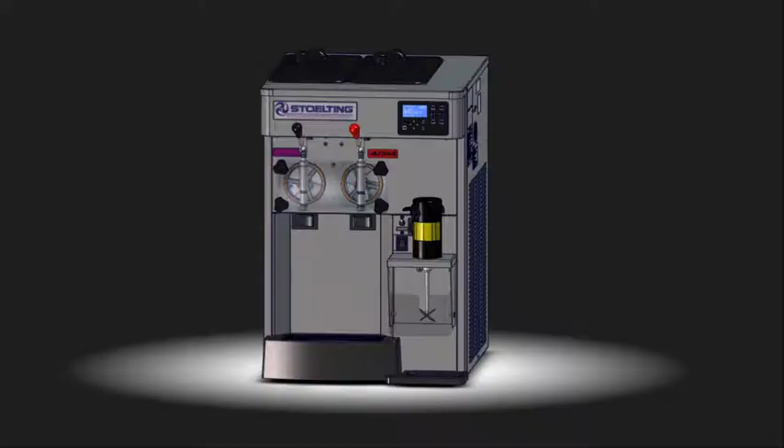Remove the hopper covers and mix inlet regulators from the hoppers. Press the off, then the clean buttons.

When the product in the barrels has melted, after about 5 minutes, open the spigots to drain. Press the clean buttons to stop the augers.

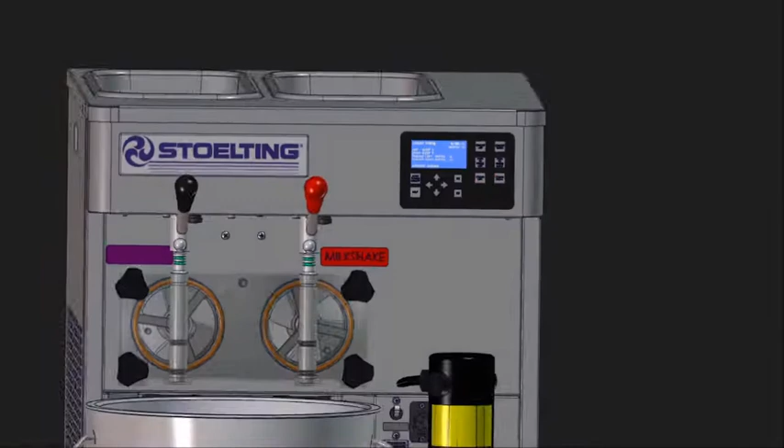Fill the hoppers with 2 gallons of cool tap water and press the clean buttons. While the augers are rotating, scrub the hoppers with a clean brush.

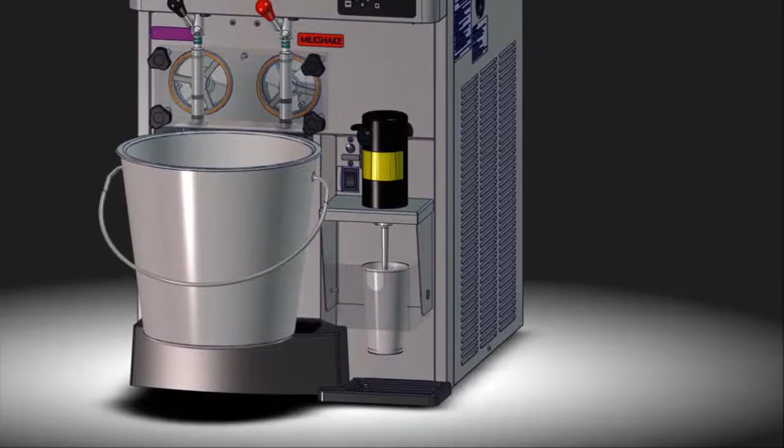Fill a tall cup with water and put the blender agitator into the cup. Press and hold the low speed button and allow the agitator to run for about 10 seconds. Turn the blender off.

Drain the water from the machine and press the clean buttons to stop the augers. Press and hold the main power button for 3 seconds to turn the power off.

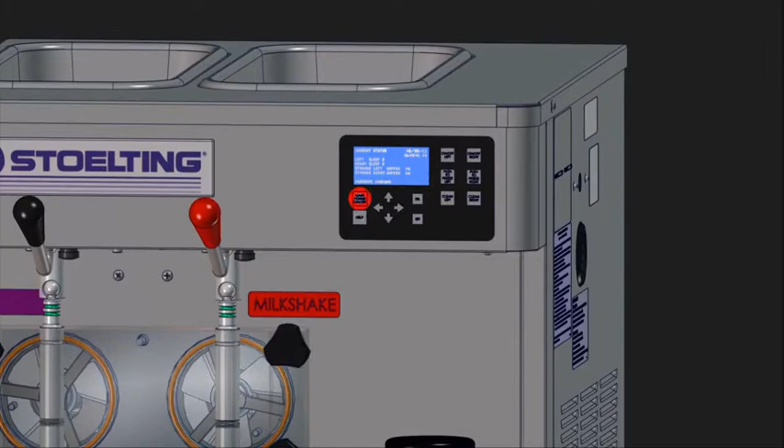Machine disassembly.

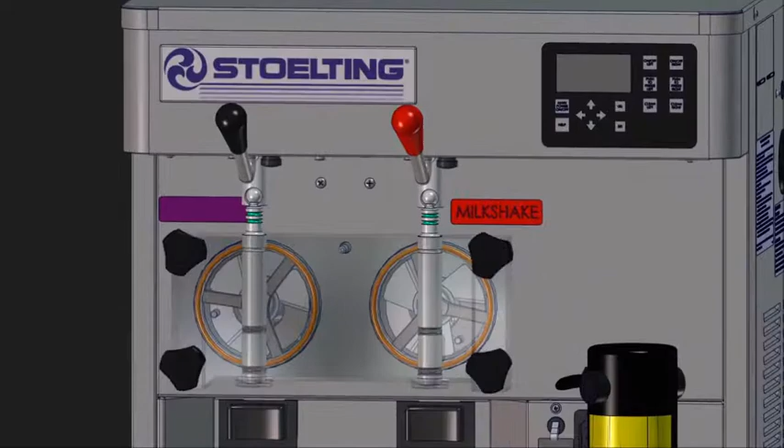Remove the knobs on the front door and remove the front door. Push the spigots through the bottom of the front door.

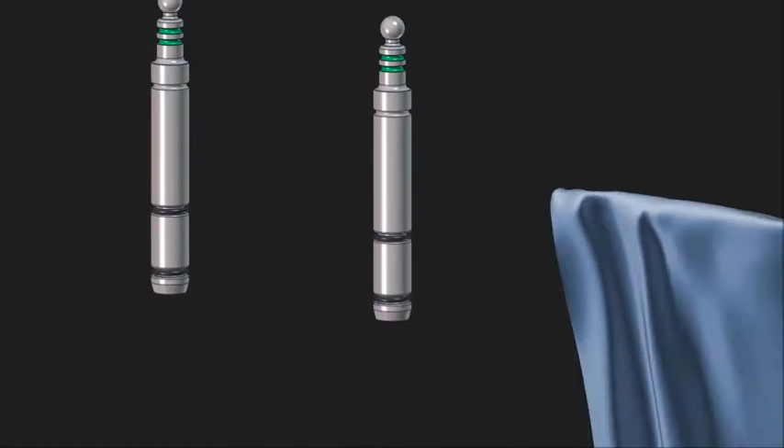Remove all O-rings from the parts. First, wipe off the lubricant. Then, squeeze the O-ring to form a loop and roll it out of the groove.

Remove the front auger supports and bushings. Pull the augers out slowly and remove each plastic flight.

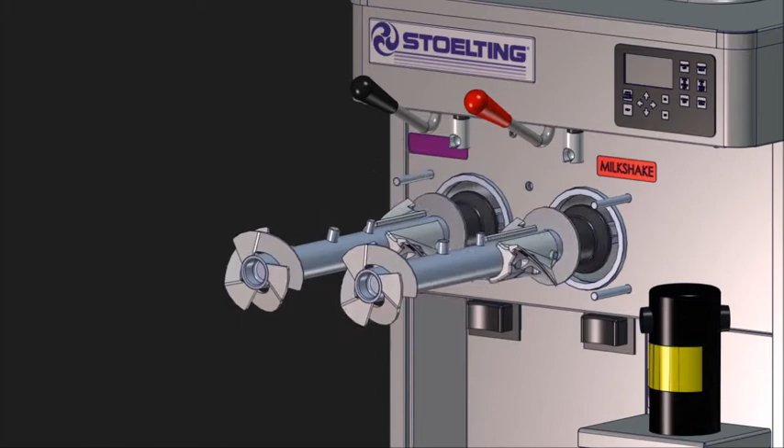Wipe the spline lubricant off the hex ends of the augers and remove the rear seal assemblies.

Unscrew the springs from the auger flights. Remove the drip tray and grid.

Remove the splash guard from the blender. Remove the agitator by turning it clockwise.

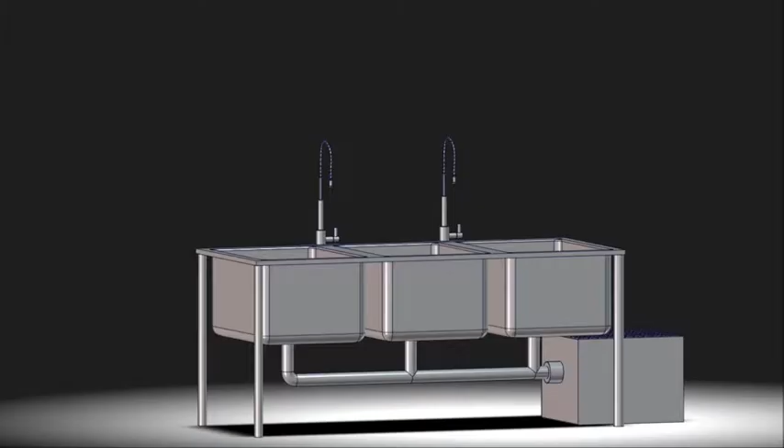Follow local and state regulations for cleaning and sanitizing. Mix sanitizer according to manufacturer's instructions.

Use brushes, sponges, and washcloths to thoroughly clean all parts. Allow all parts to air dry after sanitizing.

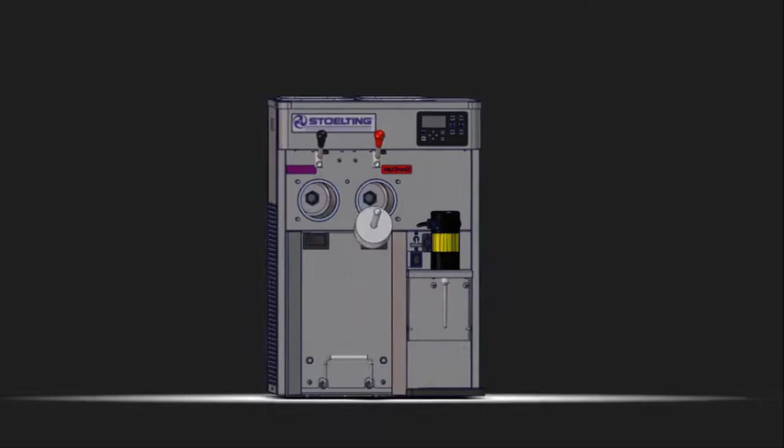Wash the freezing cylinders using the large barrel brush. Be sure to clean the rear seal surfaces.

Wash the blender shaft with a sponge or washcloth.

In a clean bucket, prepare sanitizer according to manufacturer's instructions. Sanitize the freezing cylinders using a large barrel brush.

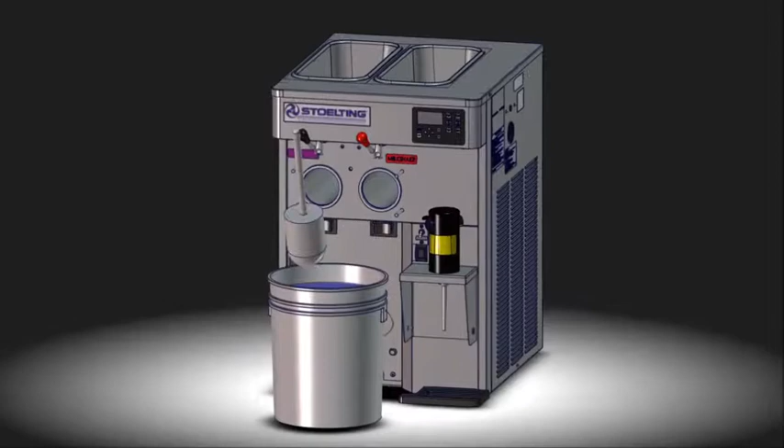Install the rear seal O-rings. Lubricate the outside of the O-rings with a generous amount of Petrogel.

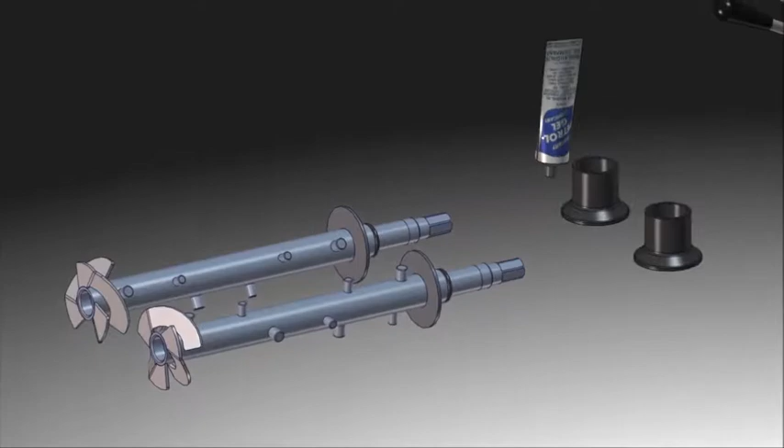Lubricate the inside metal surface of the rear seals with Petrogel and install them onto the augers. Do not lubricate the back or sides of the rear seal.

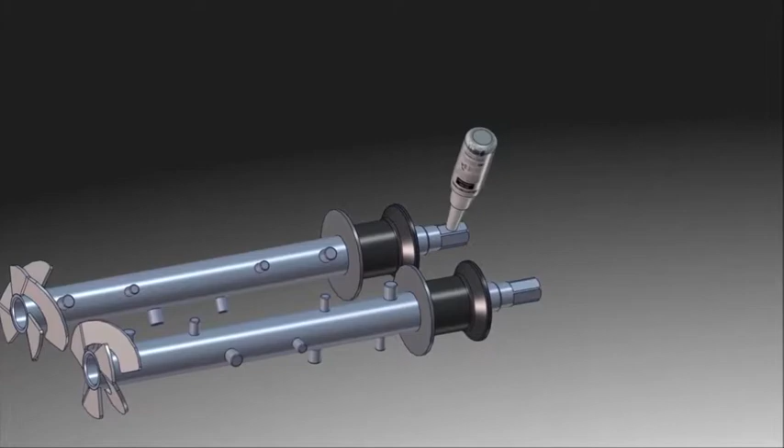Put a thin coat of spline lubricant onto the hex ends of the augers. Screw the springs into the studs on the auger flights.

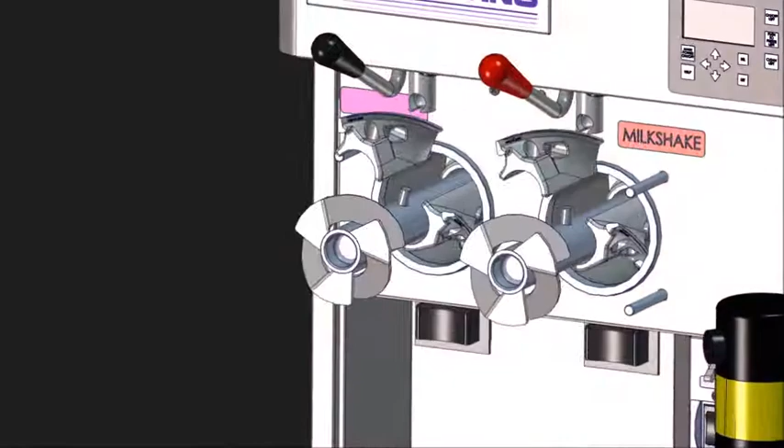Install the flights onto the augers. Rotate the augers to engage the drive shafts.

Lubricate the auger support bushings with Petrogel. Install the supports and bushings onto the augers.

Rotate the supports so that one leg points straight up.

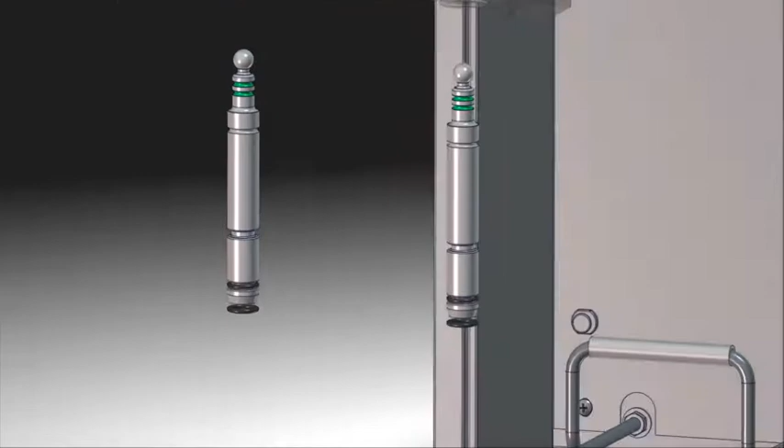Install the O-rings onto the spigot bodies and spread a thin layer of Petrogel onto the O-rings. Install the spigots into the front door.

Install the large O-rings into the front door. Tighten the knobs in a crisscross pattern.

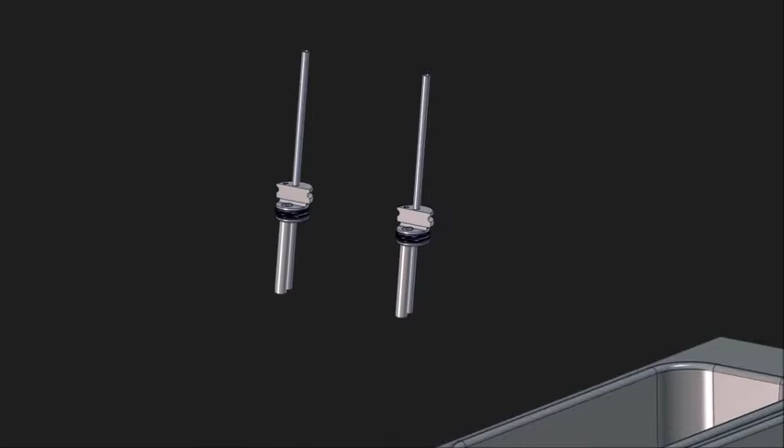Install the O-rings onto the mix inlet regulators. Thread the agitator onto the blender shaft and install the splash guard.

Install the drip tray and grid.

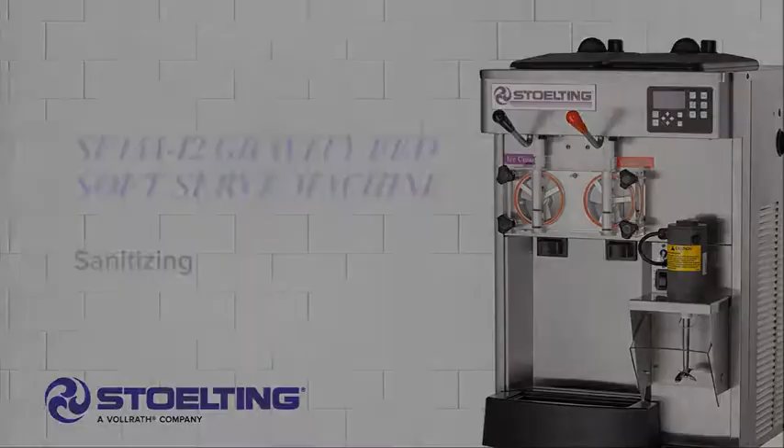Sanitizing. Prepare Stera-Sheen sanitizer or equivalent according to manufacturer's instructions. Install the mix inlet regulators into the hoppers.

Pour the sanitizing solution into the hoppers. Press the main power button to turn the power on.

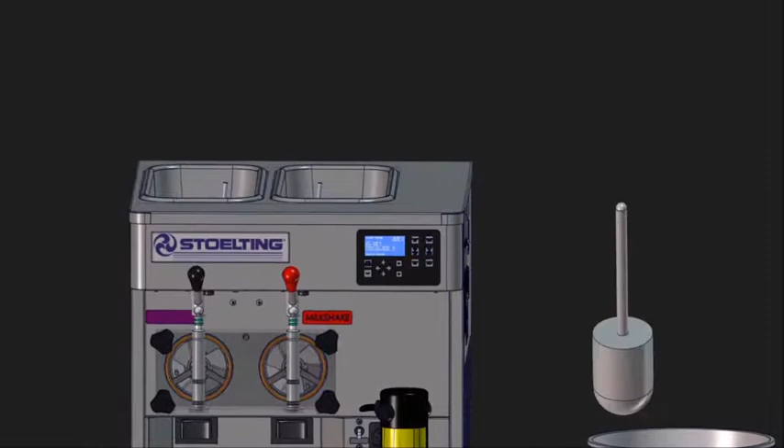Press the clean buttons. Using a sanitized soft bristle brush dipped in sanitizing solution, clean the hopper sides, mix inlet regulator, and underside of the hopper cover.

Fill a tall cup with sanitizing solution and completely immerse the blender shaft into the cup.

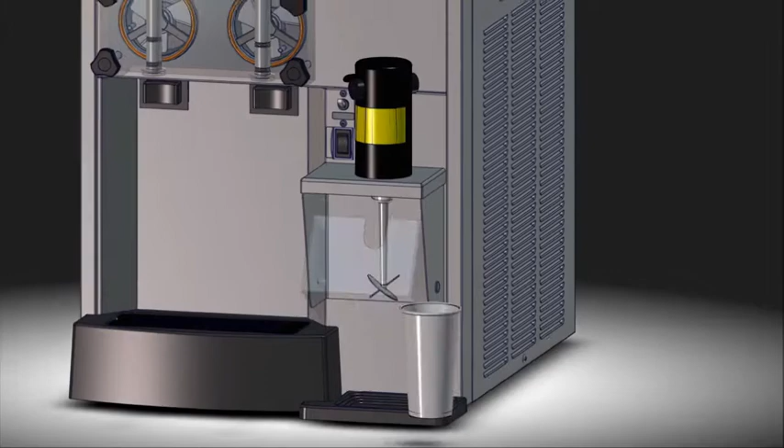After 5 minutes, open the spigots to completely drain the sanitizing solution. Press the clean buttons to stop the cleaning cycles.